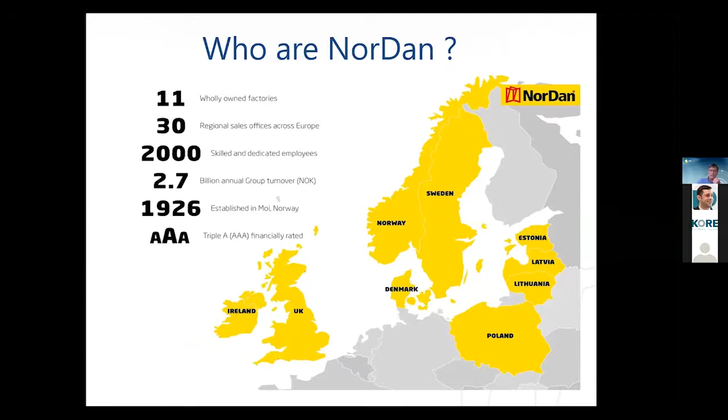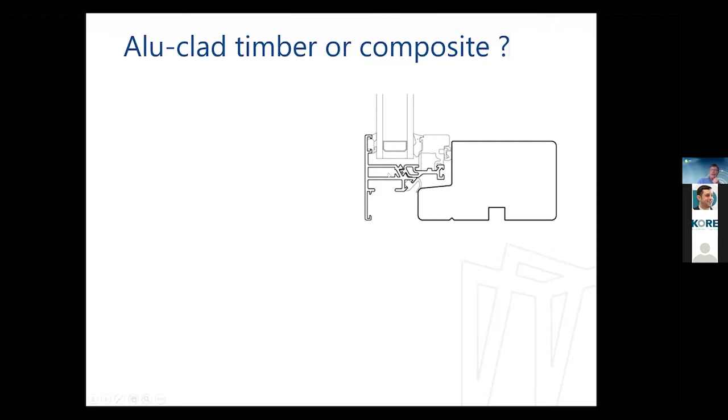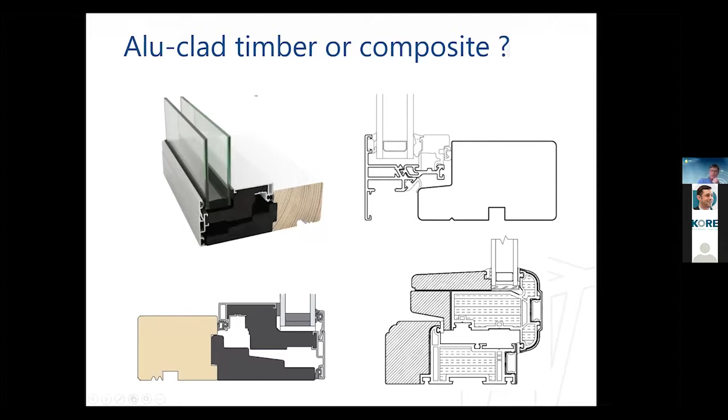Other variations on that theme include something very similar but with a polymer insulator between the timber frame and again the aluminium sash. Then there are more exotic composite constructions with a PVC core, aluminium cladding, and an internal cosmetic timber liner. All of these would commonly be described as aluclad, but more accurately they would probably be better described as composite. Now, true aluclad timber—the constructions that we do and some others—is a timber frame and sash with aluminium cladding that functions purely as a rain screen.

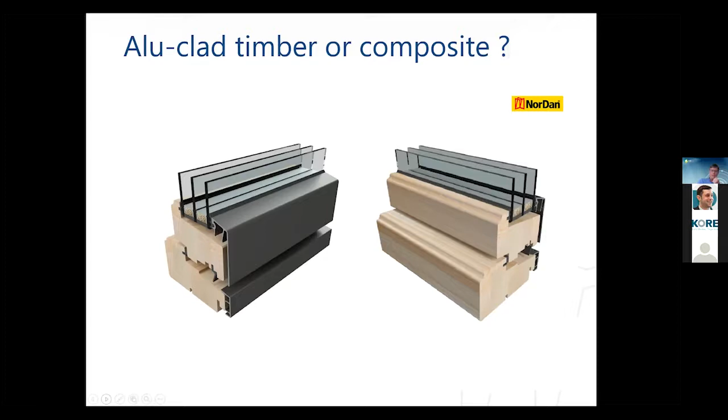It's there for maintenance purposes only, so you don't have to refinish or repaint the window. You'll see it in section. On the left-hand side is the aluminium clad profile. Take off that aluminium cladding and you have exactly the same profile. So the performance of the window is identical whether it's timber or aluminium clad - U value, solar factor, strength, water resistance, all exactly the same.

The purpose of the aluminium, as I said, is so you don't have to paint the thing very often. The advantage is that timber, from an nZEB perspective, we're talking about operational energy. One of the other factors that should be considered when specifying building materials is the embodied energy. Timber as a material, in terms of all the window framing materials - PVC, aluminium, steel, or other composites - has the lowest embodied energy, significantly less than PVC and aluminium.

So if we're talking about sustainable development, going back to the Brundtland Declaration, sustainable development is development that meets the needs of the present without compromising the ability of future generations to meet their own needs. Using timber as a frame material, it's not only carbon neutral, it's carbon negative insofar as the timber is a carbon sink.

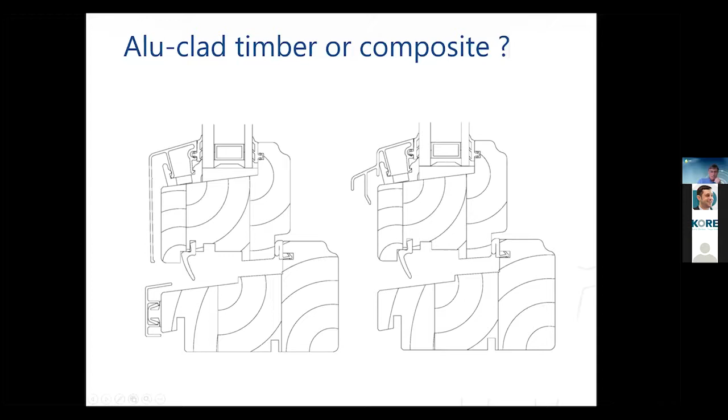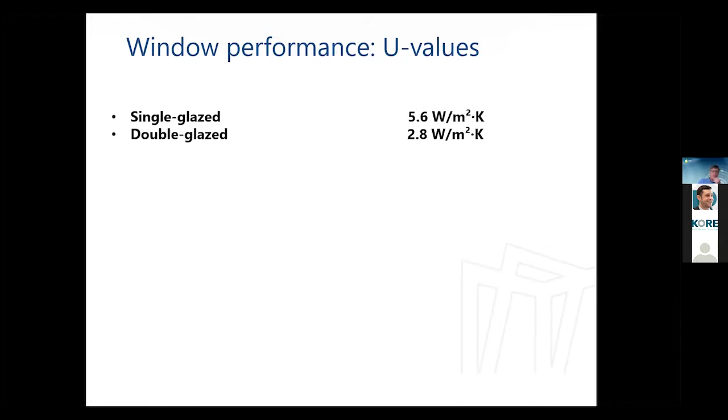Now, historically, when we've talked about window performance, the only real factor people think of is U value. So just a quick overview of U values. We started out with single glazed windows, U value of 5.6. The addition of double glazing halves the U value and consequently the heat loss.

Put a little bit of argon in there, it doesn't make a huge difference. The next big difference is the advent of low E coatings, which again more or less halve the heat loss. That low E coating is either tin or silver oxide combinations.

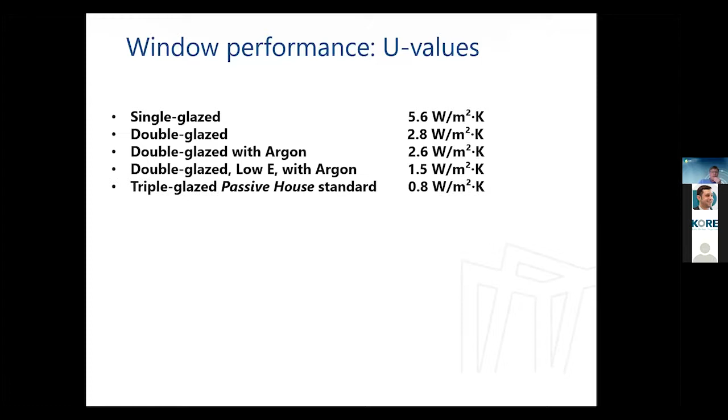In terms of thickness, with the current generation of low E coatings, if you took a pencil and stuck it on top of the Eiffel Tower, that would be the relative thickness of a low E coating on top of a 4mm pane of glass. So they're very thin, but they're the fundamental performance indicator for the thermal photometric properties of the window, the coatings themselves. The next big addition then is triple glazing, again more or less halving the heat loss.

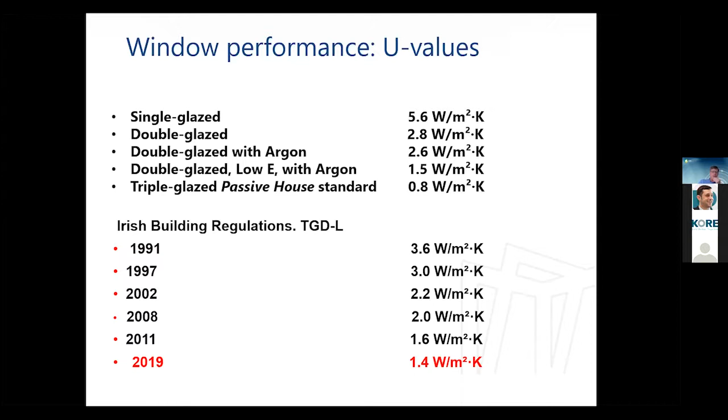Irish building regulations by comparison started out at 3.6 in 1991. Currently, the last revision of Part L brought the backstop U value down to 1.4. Now, as an indicator of the development and advance in technology of windows over the last 30 years, the heat loss through windows has been reduced by a factor of 8. I think if everything had improved to that degree, we wouldn't be worrying about nZEB or even passive house standards now. Everything would already be there if everything had improved the way the window industry has.

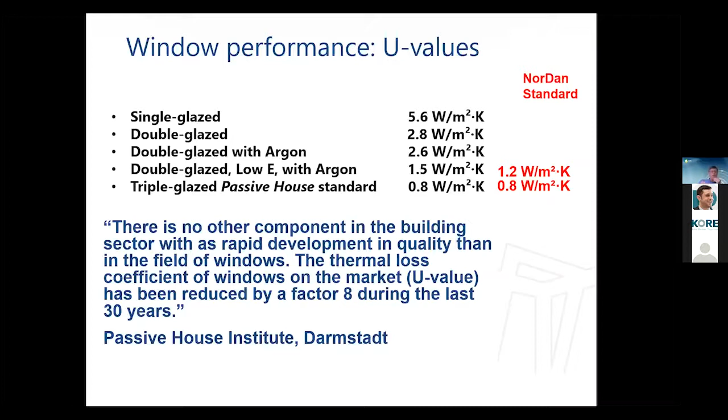Now, our standards by comparison - just as we've got a double glazed window U value of 1.2, our standard triple glazed window is 0.8. Other window manufacturers would be similar, slightly higher. So that's the level of window that's currently on the market today.

Now, nZEB, where does it go? The backstop value, as I mentioned, was 1.4, but if you build everything to the backstop value, as most of you know, you're not going to meet the overall value. So in the current updated Part L, there are 4 or 5 worked examples in the annex at the back. All of them seem to take the windows' U value at 0.9.

And solar transmittance of 0.6. Now, I assume that's the glass only rather than the whole window, which is sometimes used in the calculation, but I presume it's the glass only. So that's probably what's going to be required: triple glazing with a U value of 0.9 and a solar transmittance of 0.6.

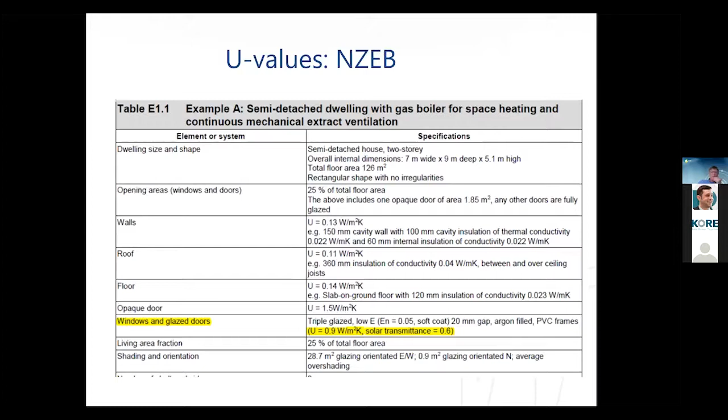My own feeling is that 0.6 may present problems, particularly with overheating. There's certainly evidence at the moment that very airtight and very well insulated buildings do have a problem with overheating. The SEAI have commissioned some work - I think AECOM have done a study for them, but one that's perhaps more in depth at the moment is one from the English Department of the Environment.

They have published a paper - it's an annex to the approved documents. It's only a consultation version at the moment, but for anybody who's interested, it's on their website. They look at the factors affecting overheating, but also the knock-on effects. So it's not just to do with Part L, it also looks at ventilation.

It looks at the implications of having to open windows to reduce heat gain, the implications for security, and also the noise within the dwelling. So the dwelling overheats, you open a window to get the heat out, but you may live in an area where that presents difficulties if you're on a busy road or there's a security issue.

It's quite an interesting document to read. This bit I've highlighted suggests mitigating measures, bringing the G value down to 0.4 rather than 0.6. They're also talking about external shutters instead of internal blinds, which are mentioned in the AECOM document. Internal blinds will reduce heat gain, but that heat is already inside the building once it's gone past the glass. So external shutters are something to consider, but the easiest and probably cheapest way is to reduce the G value of the glass. That will have knock-on effects for heat gain in winter, but that's something for designers to weigh, the pros and cons of too much heat gain.

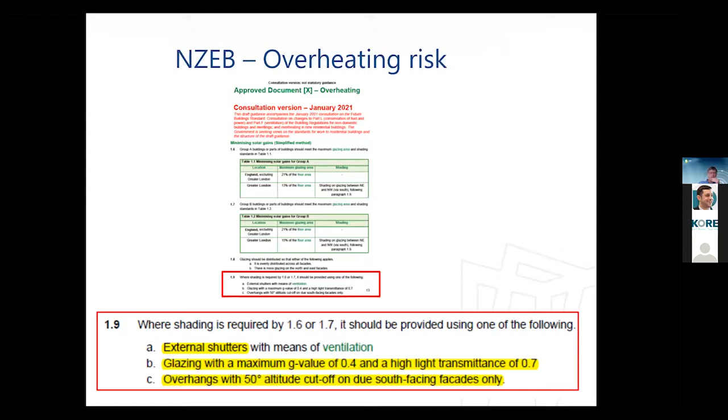Building regulations affected by windows: normally just think of Part L, but also Part B, fire safety and emergency egress; Part D, materials and workmanship; Part F, ventilation, primarily rapid ventilation rather than trickle ventilation; Part L; Part K, stairways and guarding in particular; and Part M, access and use. So you add all those up, the window and the door are multifunctional.

This quote comes from an architect who wrote a book for TRADA, the Timber Research and Development Association in the UK, Wood Windows, Designing for High Performance: although the window is one of the most critical components in any building, it is often the least well specified. I suppose one has to ask, what are those critical components? What does a window do?

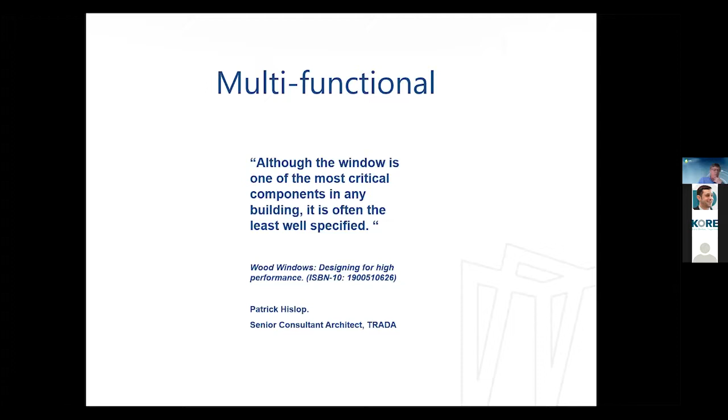It lets in daylight first, so that's the primary thing, letting in sufficient daylight. It should also allow visual contact with the surroundings, so people have a half-decent view out. Keep heat in during winter, keep heat out in summer, ensure good weather protection so you don't want wind or rain coming in, allow controllable ventilation of air into the building, keep out excessive noise, and last but not least, ensure safety, stopping occupants from falling out. So having the window do all of that can often result in compromises.

We'll jump ahead a few slides. Now, weather is a big factor in any window design, it has to be designed for the climate it's going into.

This is a precipitation map of Europe showing rainfall. The highest areas are the Alps, the Pyrenees, the Balkans. The west coast of Ireland and Scotland get a fair amount of rain, but the heaviest rainfall is in southwest Norway. In addition to that heavy rainfall, the Norwegians also benefit from the same Gulf Stream driven wind that we get here, so they get at least as much rainfall and the same rain driving. They have very similar weather conditions to us, which makes the design of their windows pertinent to what we do here.

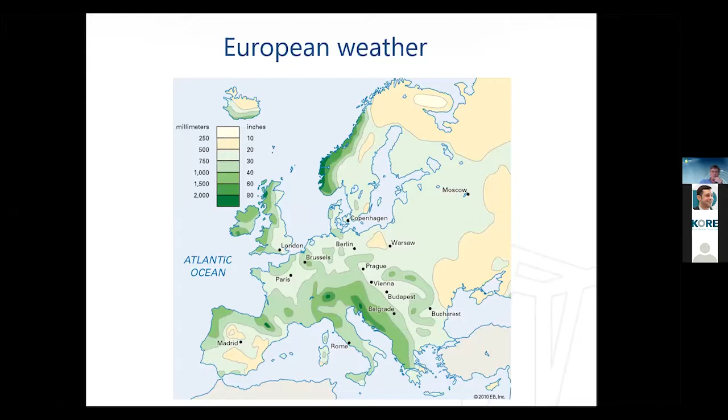This next slide shows the effects of wind-driven rain. This map compiles two data sets, rainfall and average wind speeds, provided by Joseph Little Architects, based on the BR 262 document issued by the Building Research Establishment in the UK. It breaks down into four categories, and here we've got the three highest: very severe, severe, and moderate. You can see the vast majority of Ireland is either very severe or severe wind-driven rain.

That becomes very pertinent when it comes to the detailing and installation of windows and doors. They're pretty much the only perforations in the shell and fabric of the building, so we have to make sure they're not only thermally efficient from an energy loss, particularly NZEB perspective, but more importantly, that they're physically robust. You don't want them leaking or becoming loose under wind-driven rain.

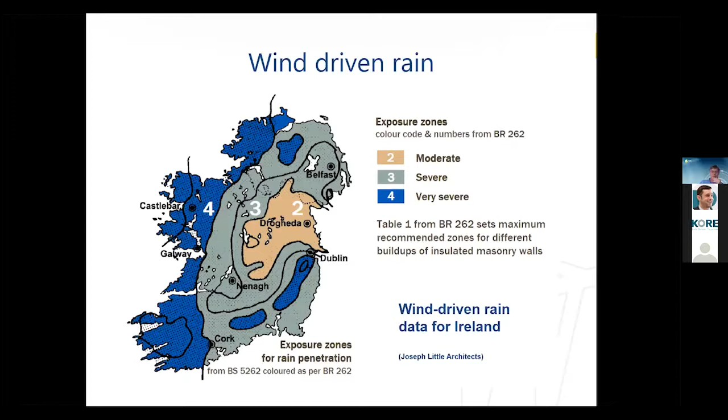So let's look at some of the situations where that comes into play.

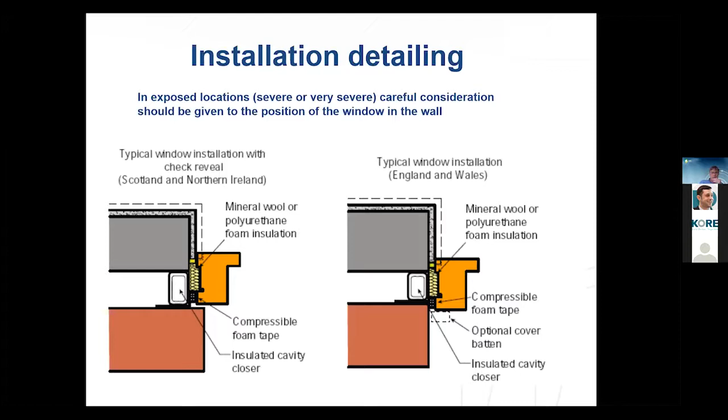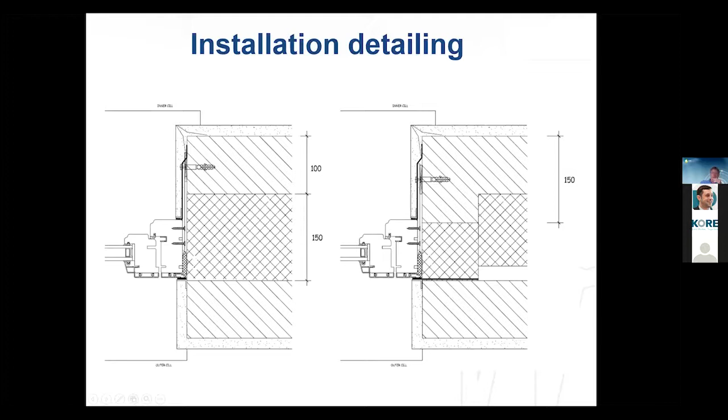On the left-hand side we have a traditional cavity wall construction, the inner leaf and outer leaf, 100 mil block on the edge. The issue from a window perspective is that with the block on edge, our fixing, even if it's slap bang in the middle, is going to be within 50 millimeters of the edge of the block. It's very difficult to get an engineer to sign off on any fixing into masonry closer than 50 millimeters to the edge of the block. What we'd like to see is the inner leaf returned so it's about 150 mil, giving 75 mil edge clearance. The tendency for designers has been to increase cavity width and keep U values down, keeping the inner leaf on the edge rather than on the flat. From a window perspective that presents problems, so it's something to be conscious of when designing your walls.

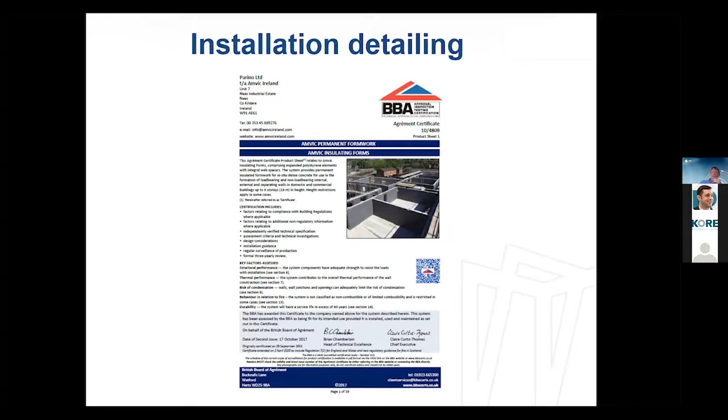The next one, which we see a lot of now particularly in one-off housing, is insulated concrete formwork. Various systems have Agrément certification - this one has certification from the BBA, though they're based in Naas. Here we see the ICF construction of the window, with a timber butt or timber frame built into the ICF construction to close off the openings. These are put in when the formwork goes in, concrete is poured, and they act as grounds for fixing the windows and doors. It makes for a very secure fixing - it's very easy for us to either direct fix or put a strap into it.

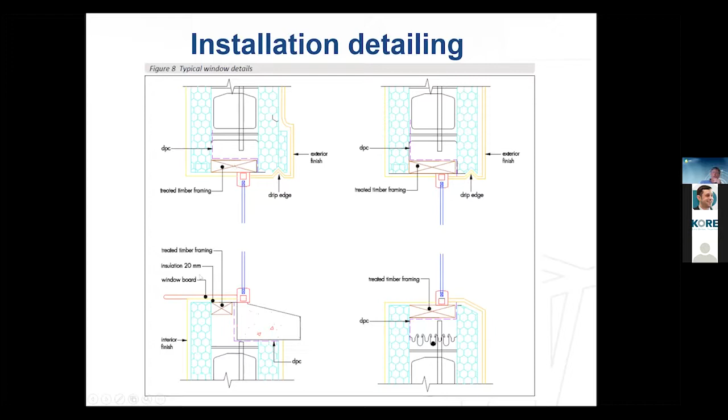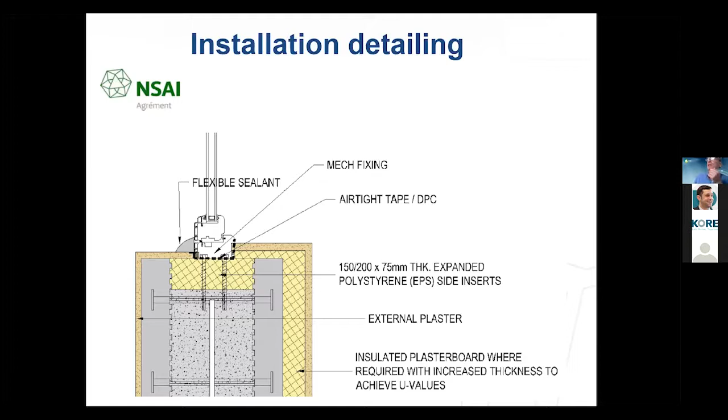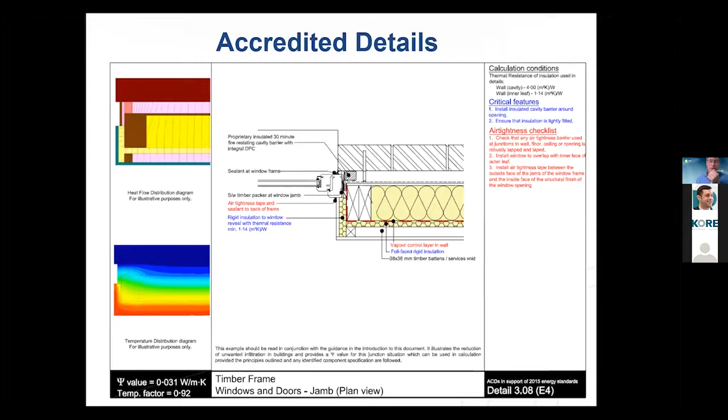It can be difficult for specifiers to determine the quality of different windows. You tend to be pretty much reliant on the claims of manufacturers, unless the certification scheme is a comprehensive one like an Agrément certificate. It's probably advantageous to inform yourself with guidance that is independent and authoritative, rather than relying on manufacturers, who I suppose we can all be prone to slightly over-exaggerating our performance and benefits in relation to others.

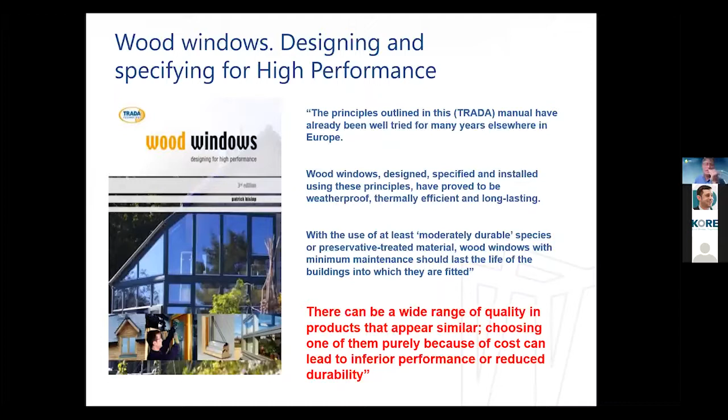But it's a very good book, available from the TRADA website, for professionals. In that book they go into the basics of window design, and we'll have a quick look here at the more important ones. What you see there is a typical window profile.

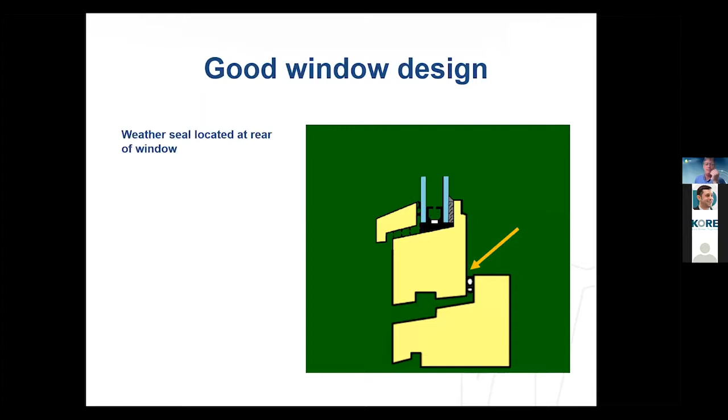The suggestions are that the weather seal is located at the rear of the window, as far away as possible from wind-driven rain, that there are no horizontal surfaces, that there's a pitch of at least 1 in 8 on any notionally horizontal surface - that will ensure water doesn't sit and pool. There's also a pressure relief zone between the sash and the frame, so any wind-driven rain, by the time it gets all the way back, has been de-energized - all the energy taken out of it by the time it reaches the seal positioned at the rear of the window.

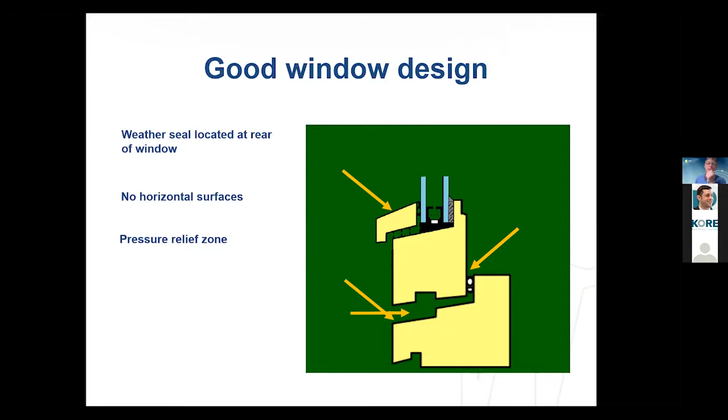Now, all seals have a finite lifespan, whether silicone or EPDM rubber. That bottom seal will be subject over its lifetime to fairly intense UV light from the sun, so you'll often see weather seals go black or brittle, and start turning up and peeling away. At some point during its life, it will in all likelihood fail. If water gets in behind it, you'll see that the rainwater has a passage to get out at the bottom and drain away again.

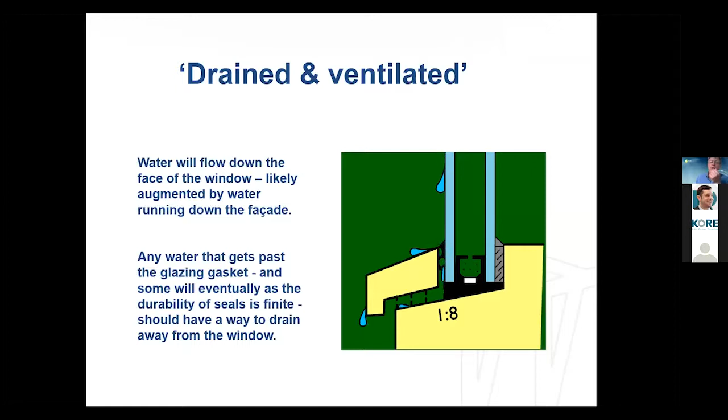Now what can happen with the old traditional design of window is that there was no drainage route for the water to get away - it just runs down the face of the window. Again, at that point when the seal fails, whether silicone or EPDM rubber, water gets in there, and if it's got nowhere to go, it just sits in there and soaks up. It will do one or both of two things: cause decay in the wood, and the water will attack the seal of the double glazed unit, break it down, and result in internal condensation between the panes of glass.

That was the primary reason why the earlier generation of double glazing and timber windows got such a bad reputation - they were built to that design. Water got in, the seal broke down, and the units fogged up. They were replaced with a new unit, and exactly the same thing happened.

Surprisingly, windows with broadly similar design principles are still being made. They're probably suitable in countries where they don't get the same level of horizontal wind that we get. If you imagine a big pane of glass subject to 50, 60 mile an hour gusts, there's going to be a lot of flexing of that glass - the more flexing there is, the quicker that seal will break down. So drained and ventilated systems are particularly appropriate for this country.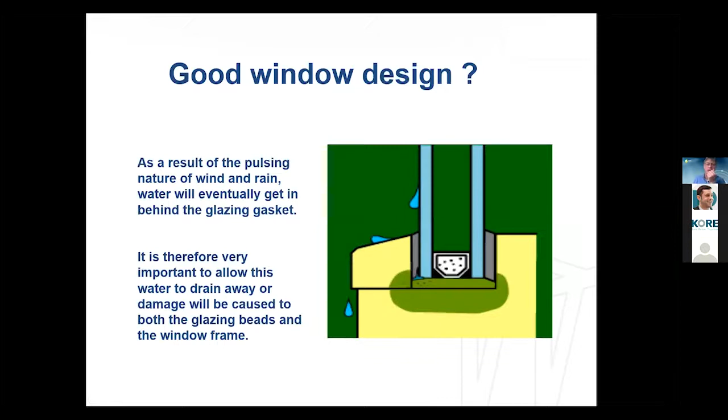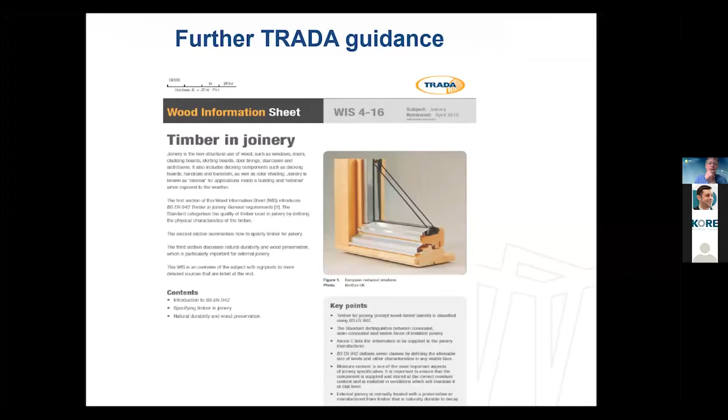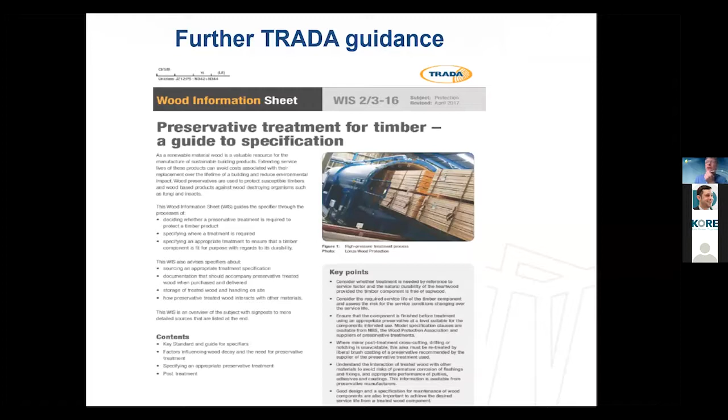The next one is preservative treatment for timber - again, it talks about the different usage classes and what types of timber require preservative treatment. And the last one is finishes for external timber. A lot of people will often overlook that in a specification, and it's unfortunate.

You spend a lot of time making the window to a good standard, a lot of money putting it in, and then it's not adequately maintained. But there are authoritative guidelines on what to specify in terms of a maintenance regime. Probably the most important thing to consider when it comes to timber windows, after the design of the profiles, is the preservative treatment of the timber.

All of those documents will refer to it in varying degrees of detail. There are two types of preservative treatment essentially. There's what's called a superficial process, where it's a flow coating or immersion. The finished timber frame is assembled and it's either dipped in a vat of preservative treatment or it goes through a painting machine. There's a short video here that will show you.

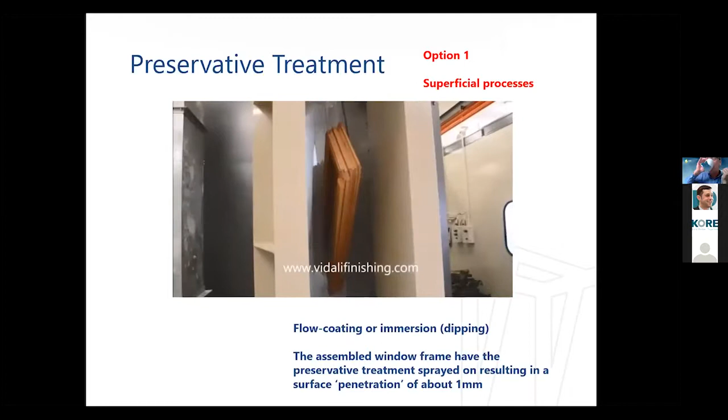That process results in a fairly shallow coating of preservative treatment, about 1 to 1.5 millimeters. Some of that may even come off when the window goes to the next station where it's sanded down prior to painting. So if the maintenance regime on that window is fairly poor and paint starts flaking off after a period of time, which many of you would have seen, and it's not refinished quickly enough, the wood then starts to go grey and decay, and that preservative layer is more or less defunct.

The other problem with that sort of coating is that if there's any damage to the window during the construction process—it takes a knock from a scaffold pole or something like that, there's a big dent put in it—again, that protective layer of preservative has already been pierced.

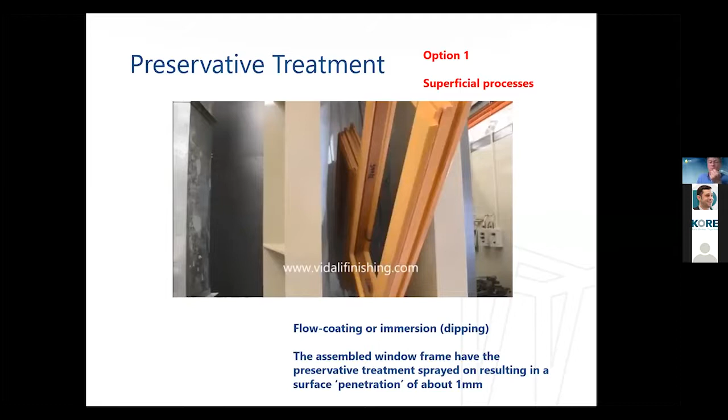But this particular process is popular with some window manufacturers because it's pretty cheap. The window is assembled, it just goes through a spray booth, and it's very quick. Let's look at the traditional method, which many of you may be familiar with: the vacuum impregnation process. I'm going to show a quick video of how this process works, and I'll talk about the benefits of it afterwards.

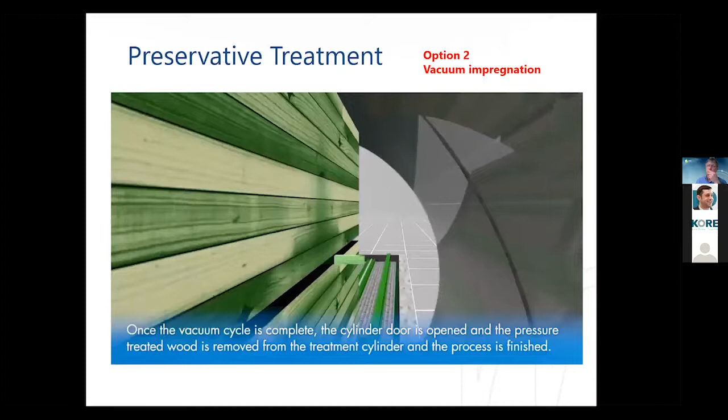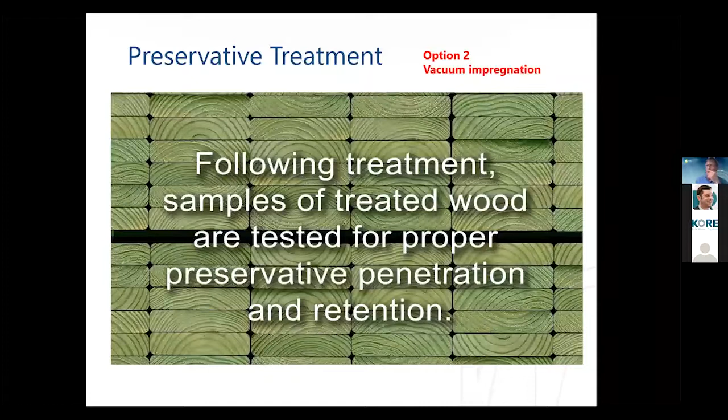That video showed structural timber for framing or for decking. When it comes to window manufacturing, all of our timber would be machined and profiled prior to going into the impregnation tank. When it comes out, it then immediately goes into a computer-controlled kiln to dry it out. The whole process takes about 8 hours.

But the process is thoroughly controlled to ensure the right amount of preservative goes in and that it's dried at the right speed in order to minimize any movement or deviation in the timber, seeing as it's all being machined. That then becomes important when we look at the next slide.

We can see there from the vacuum impregnation that we get approximately 6 millimeters lateral penetration, and a minimum 50 millimeters on the end grain—typically it comes in about 125 millimeters on the end grain. But this is important because it's that level of impregnation that matters.

It achieves an NP3 classification according to BS 8417, the Preservation of Wood Code of Practice. It's a standard guideline for the preservative treatment of timber to ensure its suitability for construction and the climate we have here in the British Isles. It's not an EN or European standard, just something suitable for the weather we have here and the building processes.

So this vacuum impregnation, if you want to ensure a 60-year expected service life—BS 8417 breaks down service life for joinery into 15, 30, and 60-year cycles—the only way to get that 60-year expected service life is to use vacuum impregnation rather than one of the superficial processes.

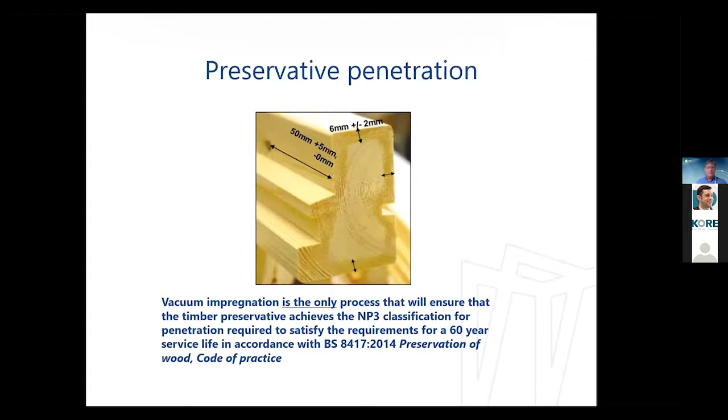Now, other factors not necessarily related to nZEB, but something I think is important when it comes to window specification: unfortunately there's nothing in the Irish building regulations I've seen that relates to the security of the dwelling. You can see here, from the Garda website, that approximately 98.5% of burglaries here are either through windows or doors. I guess the other 1.5%, they can't climb down the chimney or something.

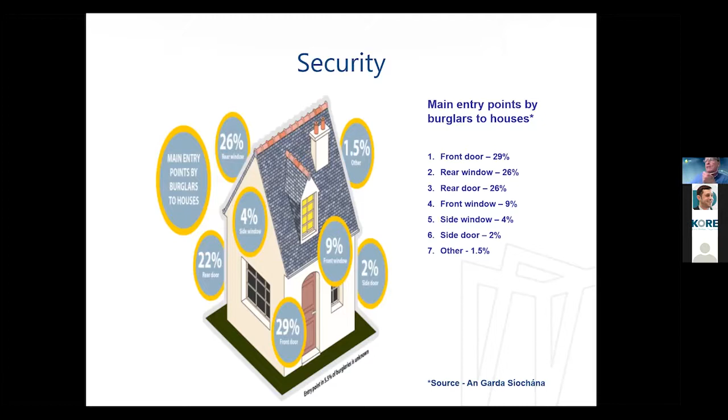Not sure exactly, but the next slide here, the Garda do refer to this on their website. There's a crime prevention section, but this is the only official documentation I've seen that relates specifically to windows and doors when it talks about enhanced security. There's an EN standard, 1627, and there's a scheme run by the police in the UK called Secured by Design. Many of you may be familiar with it, but what it involves is enhanced security testing of products for a building.

It's not just to do with windows and doors, it's to do with the whole building. It can deal with schools, commercial buildings. But what it's designed to do is make the job of the burglar that much more difficult.

When it comes to houses, if you put laminate glass in ground floor windows, it makes it very difficult for a burglar to get in. You put a simple lock on a front door - a lot of those Euro cylinders, a thief that knows what they're doing can get in less than 10 seconds. They snap the lock, put a screwdriver in, and they're in. These enhanced security methods make it much more difficult.

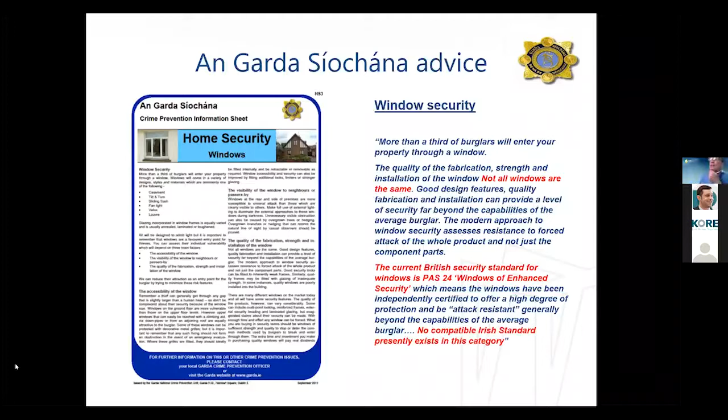It significantly reduces the amount of burglaries. It doesn't add much to the cost of the dwelling, and it's something I think any designer should consider.

An overall summary of things to look at when you're looking at window specification: performance, certification, and warranty. Third-party certification is very useful insofar as the certification body will be experts at what they're looking at. Often the specifier may have limited knowledge of the particular product.

You've got different types of certification. There's basic certification, which involves testing of the window or door. Then there's enhanced certification, which involves the testing and factory audit visits to ensure that what has been tested is being produced on a day-to-day basis.

Then you'd have the top of the range certification, which is agreement certification, where the certification body will not only do the type testing and factory audits, they will also do assessment of the product's durability. They'll do corrosion resistance testing on the ironmongery, and cyclic testing - open and closing cycles. So they'll have a fuller picture and ability to offer an opinion on the durability of the product. You get that from the likes of NSAI or BBA.

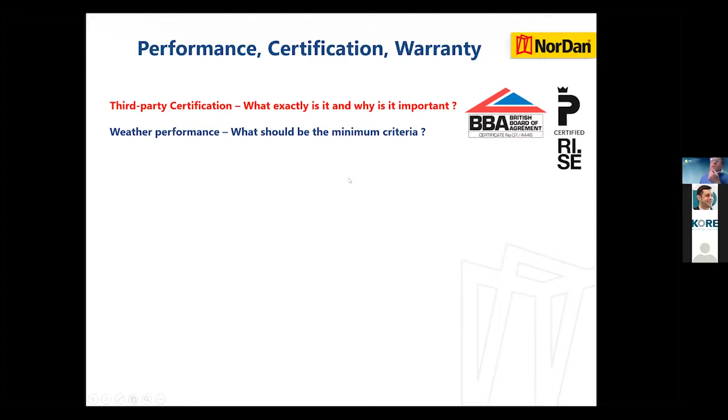Weather performance - what should be minimum criteria? Most windows and doors on the market should be able to meet a water tightness class of 600 pascals, wind load 1200 pascals. That will vary depending what part of the country and how high you're going.

Air permeability is relevant to nZEB. Pretty much any window or door now should meet the class 4 category for EN 12207 - that's effectively zero air leakage at 600 pascals. That's the requirement for passive house standard, and I think it's not that demanding for a modern window or door.

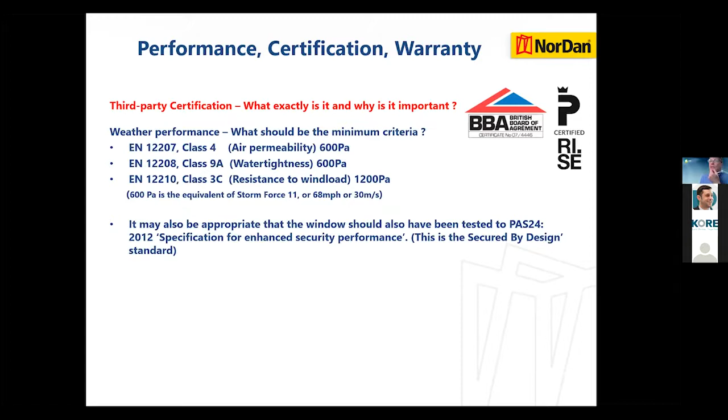Again, it may be appropriate that the window should have been tested to PAS 24, secured by design. You do see that in specifications - particularly some of the councils are looking at it and specifying it. Unfortunately, there's no oversight to see that it's enforced.

You can put it in your specifications. The manufacturers of windows and doors - everybody has it because they have to have it if they want to sell into the UK, and it's used in Northern Ireland, particularly in public sector housing projects. So it is there. If you want to put it in the specification, it will certainly pay for itself in terms of reducing the incidence of burglary.

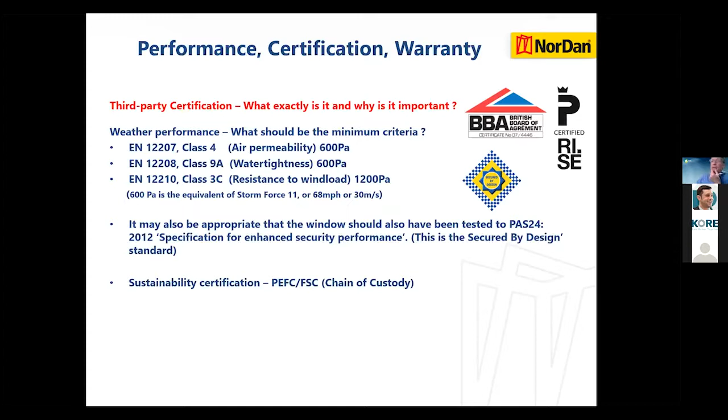Sustainability certification - PEFC or FSC for timber - that's pretty much mandatory now. There are different levels of certification. The top end is chain of custody, which means everything that leaves the factory has full chain of custody - what has gone in has come from certified sustainable forest, and everything that leaves the factory is certified as coming from that timber. Some of the small manufacturers don't have chain of custody. They will rely on just buying a batch of timber that has FSC or PEFC certification and will sell it accordingly.

Environmental product declarations - we have those now. If you want that level of information, we have cradle to grave life cycle analysis available, showing all the carbon content, not on the full range of products, but on the majority of them.

What sort of warranty should you look at? We would suggest we can provide a 20 to 30 year warranty on the frame - 20 years on a timber frame, 30 years on an Aluclad timber frame. That's as a result of the preservative treatment that we use. On components like ironmongery, glass, etc., we again offer a 10-year warranty.

You will see less than that, and you will sometimes see more than that, but 10 years shouldn't be a problem. Glazing units have an expected service life of about 30 years and possibly longer.

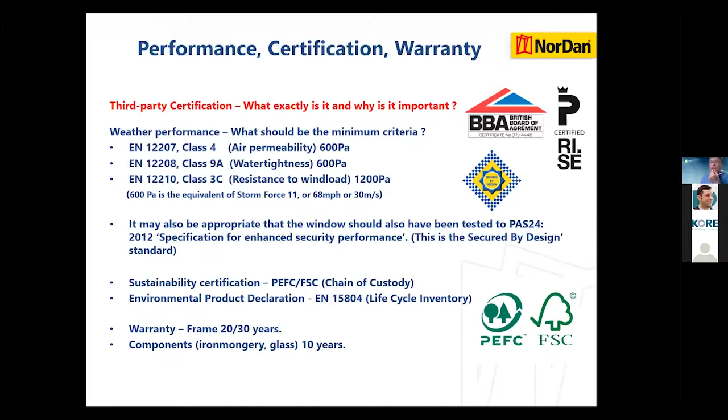And that's what's there currently. Now, this is just a quick video showing windows - what's coming and currently available if you are in the Swedish market, but perhaps due here shortly. Just to give you an indication of where the window industry is going.

That can then present some issues with the insulation values of the profile. The better systems have a reinforcement profile that is thermally more efficient. The cheaper ones rely on fairly basic profile, and then you get some systems where there doesn't appear to be any reinforcing profile. They put in a foam insulant to further reduce the U value of the framing material itself. So without any reinforcement in the PVC profile, you're very much limited on the size of the opening sections and fixed lights you can make before you start running into problems with it expanding too much when it gets warm.

Those issues will also tend to apply on the darker profiles. The lighter white color profiles are much less prone to expansion. But the better PVC systems, that won't really happen. The lower quality ones, yes, it will. I suppose the issue then is for the customer in how to identify what's what. But yes, it's a problem. No, it's not a problem with the better end systems.

Great. I guess the next one is one that you touched on a little. It's about overheating. It's becoming much more of a question. I see it coming up all the time, and someone has asked about retrofit and adjusting the G value, and what are the possibilities with that.

We can do that as window suppliers and window manufacturers. We are not experts on the energy balance. We would take direction from the specifier saying what G value or U value is required. We don't have the competence to advise on what's required. We can just say that's the G value of our window. But there is, some people may be aware, may not be, that generally the lower the U value you go, the lower the G value you will go as well.